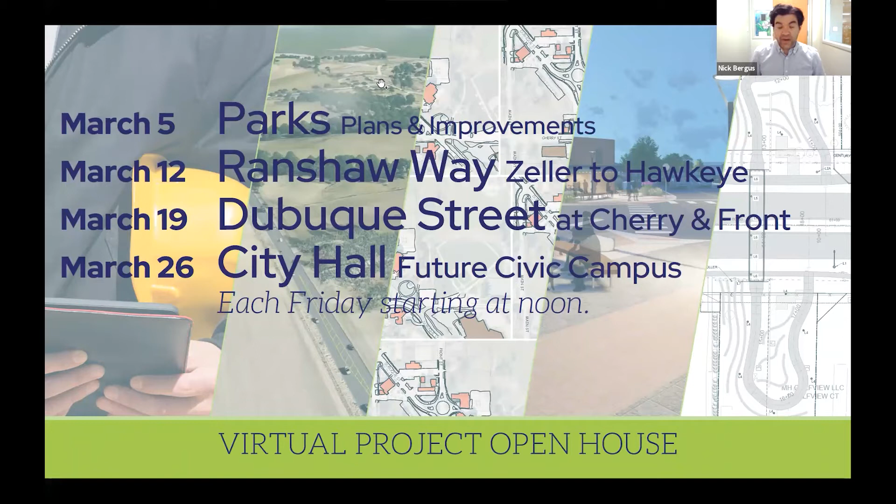So today, we are talking about Ranshaw Way Phase 5, which is improvements from Zeller Street to Hawkeye Drive, including widening that road, trails, side paths, an underpass, and obviously some landscaping in there.

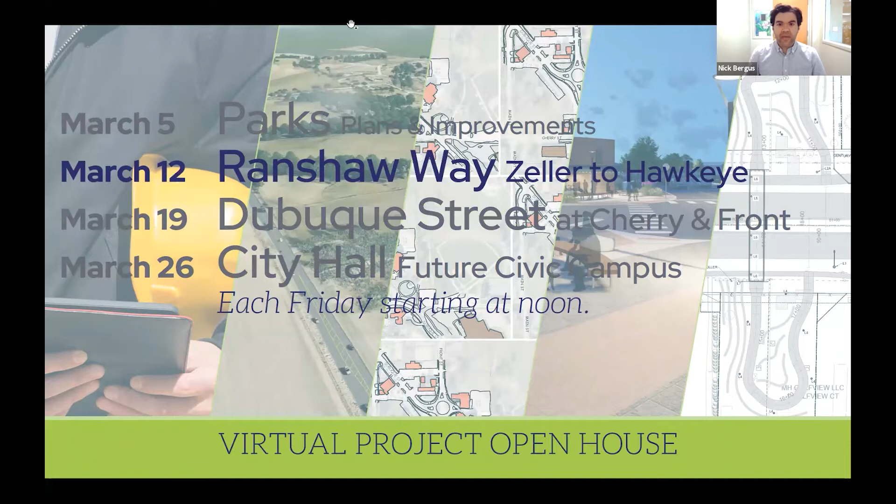Before we get to that, I wanted to start by introducing the project team here today. With me today is City Administrator Ryan Heiar. Ryan, thanks for joining us. Engineer Josiah Bilskemper, who's with Shive Hattery, the engineer on this project. And landscape architect Emily Naylor. She's also with Shive Hattery and has worked on a lot of beautification here in North Liberty. Thank you both for joining us on this too.

So let's go back to the locator map here. This is, again, work that'll be happening on Ranshaw Way between Zeller Street, where we left off at the last project, and all the way down to Hawkeye Drive, which is right about here.

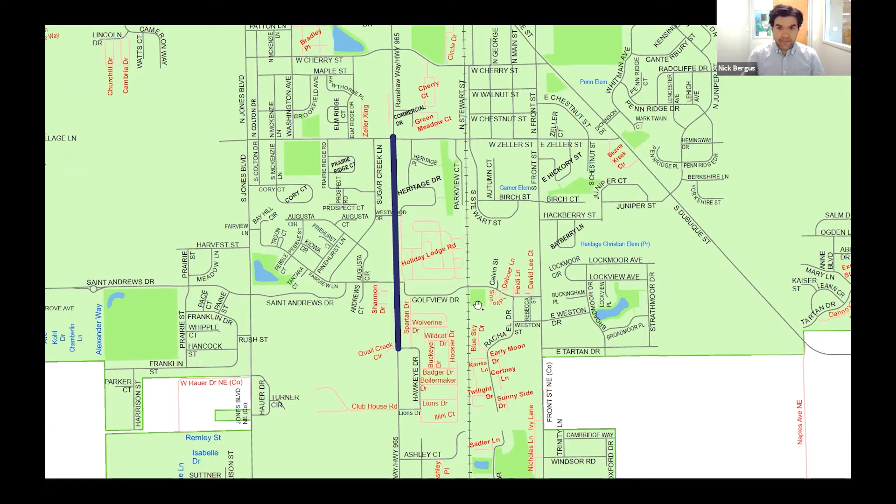So I wanted to bring Ryan Heiar in just to talk a little bit about sort of where we started, how this fits in with some of those previous phases and why now, and some of those other big questions. Ryan, thanks for joining us. Well, good afternoon, everyone. Thanks for organizing this, Nick.

This project has some history, actually. In 2007, shortly after I actually arrived in North Liberty, the city council approved a master plan for then what we called Highway 965. That planning process took about a year or so, and then early in 2008, they approved the plan. And what I really liked about this process is that it was a joint effort between the city of North Liberty and the city of Coralville.

And so what we've called the Highway 965 master plan, now the Ranshaw Way master plan, also extends down to Coral Ridge Avenue in Coralville. So it's a great planning exercise between both communities.

So we are, what Nick I think entitled it, the phase between Zeller and Hawkeye. We're affectionately calling phase 5 of what we're hoping is 6 phases altogether to complete the master plan. So to date, we've completed 1 through 4.

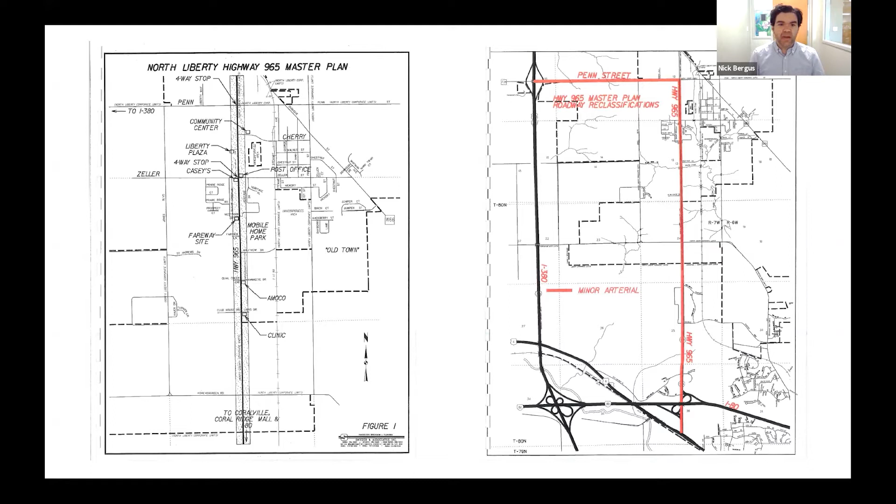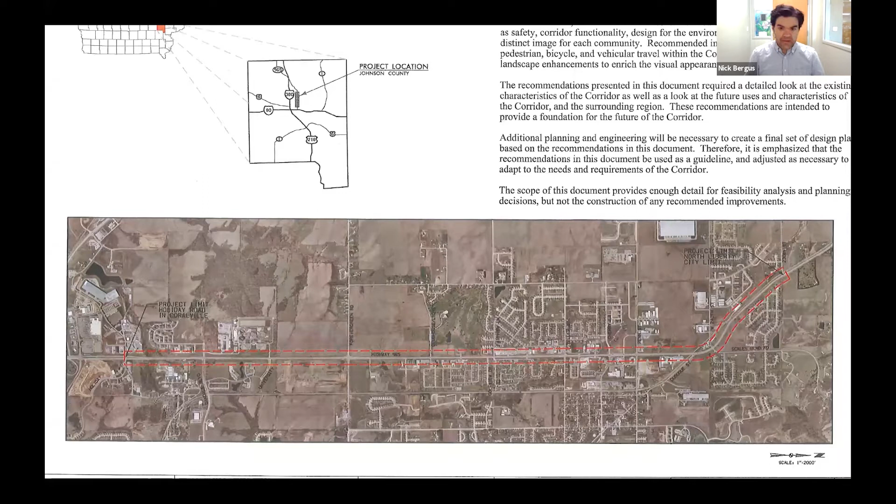So there's not much out there yet, so this has been a long time coming. This has been a major arterial for a long time, and we've paid a lot of attention to it. As Ryan mentioned, we do have the master plan that we worked on with Coralville, and we've stuck pretty much to it. This is the North Liberty intersection sort of examples that we've been using throughout.

And I did want to bring Emily in to talk a little bit about transitioning, right, that old rural highway to what is now this urban road, and why, when we talk about that, we pay attention to not just the functionality, but maybe some of those other parts and what those can do for us. So Emily, let's talk a little bit about landscaping before we talk about the specifics—why do we do sort of landscaping and care about those things at all when we're doing transportation projects?

Sure, Nick. Well, streets account for the largest amount of public space in North Liberty. It's really a public corridor, and we really try to follow those contemporary planning practices that aim to make streets more than just vehicles going from point A to point B. So we really want to consider safe circulation for pedestrians, cyclists, drivers, and users of public transit.

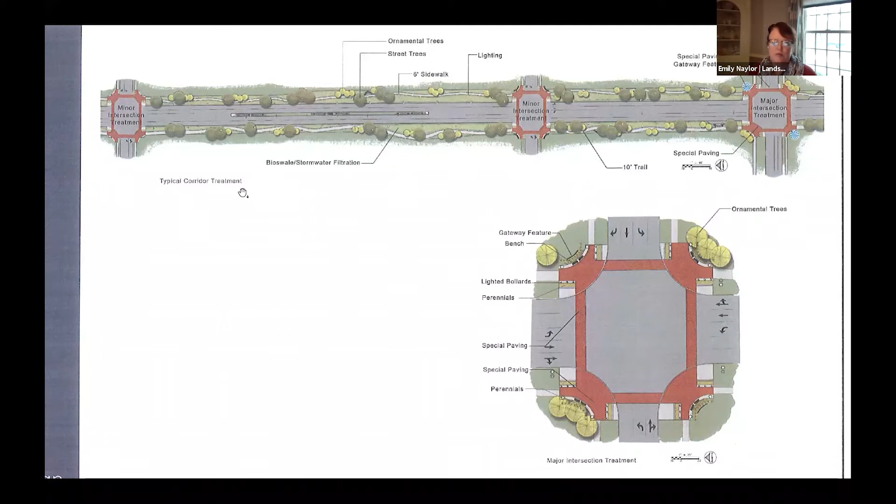In addition to building on the Highway 965 or Ranshaw Way master plan and completing that continuous aesthetic character, we also are looking at layering other ways to denote North Liberty and that community character and tie it in community-wide. So not only are we looking at this phase 5 as an opportunity to extend the original master plan theme, but also start to layer in some of those other points to tie community character. It's really one of your strongest, most considered a billboard for your community—it's a way to really repeat that community identity, so people really understand when they're in North Liberty.

And certainly with the streetscape, there's some very, very specific elements here that are going to be very unique to North Liberty and may serve as destinations in themselves. So we'll show you a little bit here in a second. Well, great, thank you, Emily.

I'm hoping to bring in Michael Pentecost, who I think has joined us. Michael, are you able to talk us through sort of what the current conditions are? Obviously, a lot of folks drive Ranshaw Way every day, but when we talk about transportation projects, we really do have to deal with what's there, and that really can impact the project. So, Michael, can we talk a little bit about what's out there right now?

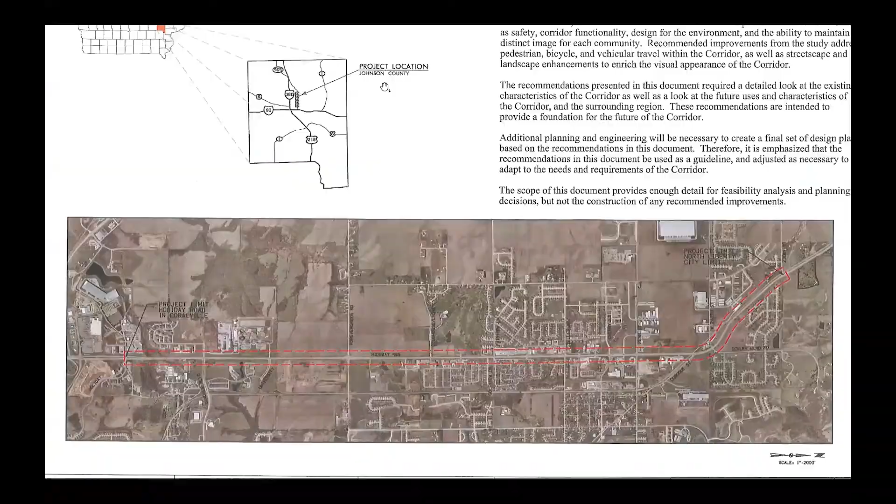And that helps for a number of reasons—it helps with traffic flow, it helps with safety. Did I lose you, or you still got me? You're still there, Michael. Okay, sorry. All right, we're getting a live report from the field. This is great.

And there we lost him. So thank you, Michael, for that live breaking news report from the field. Michael Pentecost, our street superintendent.

That was great. So obviously we're trying to solve some of those problems about efficiency. How do we move different types of traffic, whether it's bikes, pedestrians, or cars through that area? We're also working through a variety of constraints. We've got the I-380 project, which we have to consider as we make plans for this project. We've got to think about how we time this project based on other projects in town. The big one, and this is always the biggest uncontrolled factor, is weather, and that's something we try to plan around, building in some space for it.

And Michael's back with another breaking news report. Sorry, I had another call come in and it kicked me out.

So basically, for example, when my crew's out there trying to make repairs or patchwork on these sections, when you're down to two lanes, it's pretty difficult to do that. Or the gravel shoulders, those are a high maintenance area to continue to keep safe. These projects take care of that. We go to a curb and gutter system, and it really helps improve and bring things up to the traffic flow going through there.

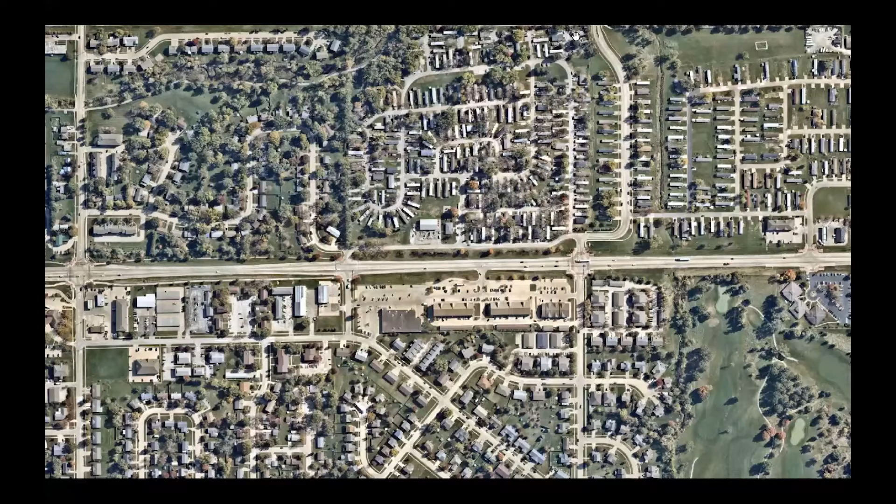So again, this is the current conditions, an aerial shot from the past year. So let's get into this project in particular, and let's start with Josiah to take us through a quick overview of the plans for the finished product.

Yeah, sounds good, thanks Nick. This graphic provides a high-level overview of the project. As everybody's mentioned, we're starting at Zeller and continuing south down to Hawkeye Drive. For this portion, starting at the north end and working south, notable improvements include rebuilding the remaining fourth corner of the Zeller Street intersection. The other three corners were done during the phase 3 project, and now everything's ready for that fourth corner to be redone to match that intersection, which is a major intersection for the city.

The overhead utility lines, like we've done in other sections to the north, are in the process of being removed and buried underground. You'll see that happening here in the next month or two, where some of those overhead lines will start disappearing.

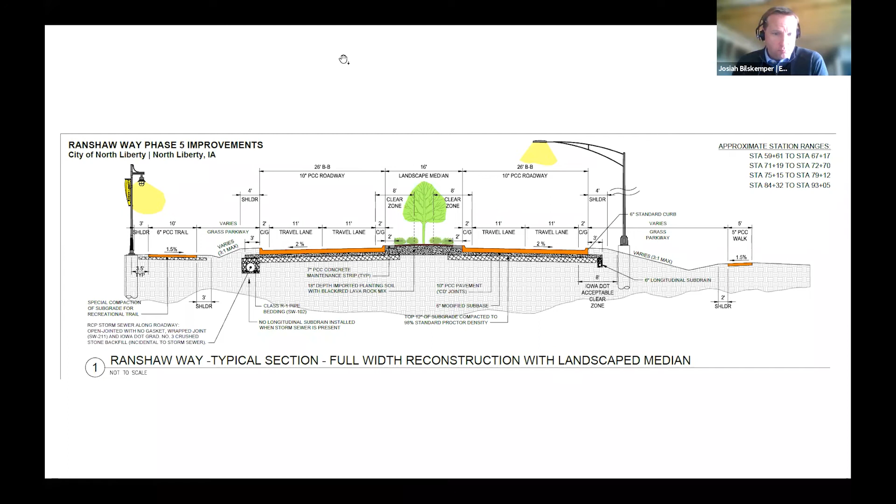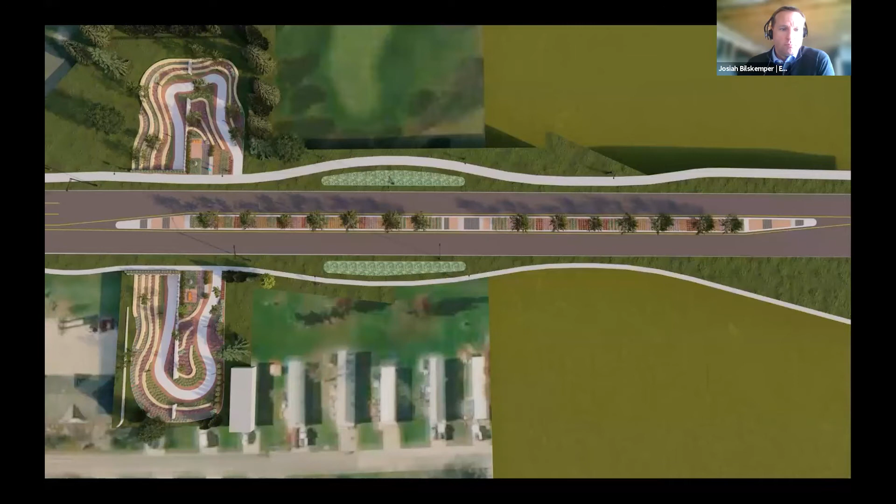All right, before we get into the phasing, I want to come back to Emily and talk through that underpass and some of the landscaping in this particular project. So this is kind of the artist's rendering of what we've got going on.

Emily, you want to talk us through these? North is again to the right there. We've got the golf course at top of screen, and City Hall is up to the left off to the corner, just for orientation. So really what we're showing here is this application of blending the existing Ranshaw corridor master plan with some of the improvements, as Josiah said, that fourth corner being built up — it's all going to be the same.

But then how do we start to layer in some of these other elements we're picking up in other places — the Dubuque Street roundabout, the new parklet near Centennial Park. So you're seeing along the median there swaths of landscaped areas, unique to Ranshaw, but reminiscent of some of the plant material you'll see in other places in town, such as along Penn Street.

So as you're coming down the bike trail, you can descend to cross under, and this is a very engineered solution — we have to get people down at a certain percentage, and we just try to add a little bit of interest there. It's not such a straight shot, and we're building out the plant palette. The city does such a great job keeping things looking great, and we've really refined that palette with things that are easy to maintain.

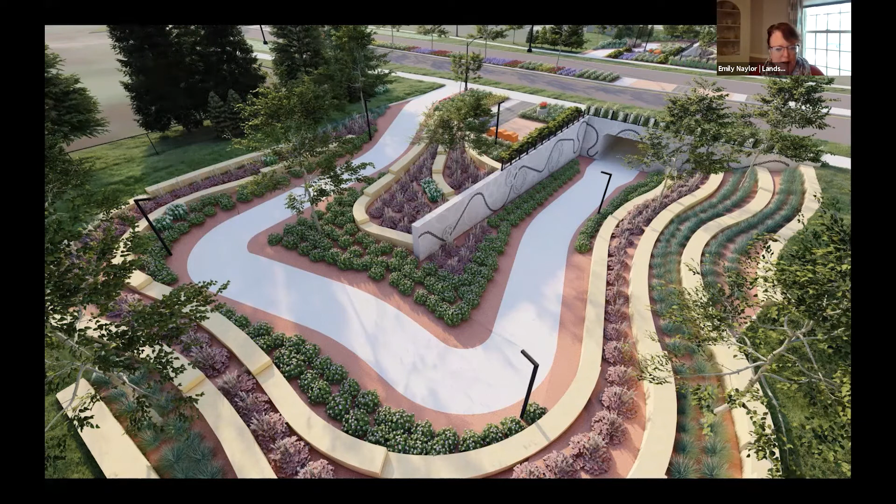And since we have to have this kind of engineered solution, this hard, crisp wall, we took the opportunity to put a playful additive there. What we have is a unique, artistic element to speak of the bike and pedestrian connection there.

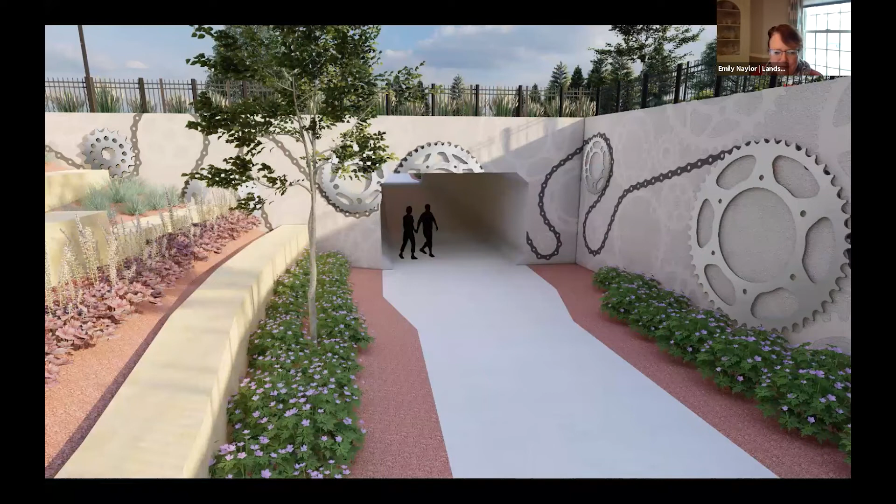We've got oversized bike gears, and the next slide shows that a little closer up. Some of the gear shapes are sandblasted into the wall, some are aluminum affixed directly to the wall, and some stand out and will actually glow at night. So it gives a little bit of interest, and almost serves as a destination.

Some people like to go out and come back a certain way, and this might be somebody's preferred trip, maybe as the sun's setting, just to go out and see the lights when they come on. So again, trying to add in those layers of additional interest and flavor to the community. I'm looking for unique opportunities in all of the public projects we do, really spreading those dollars and getting more bang for the buck.

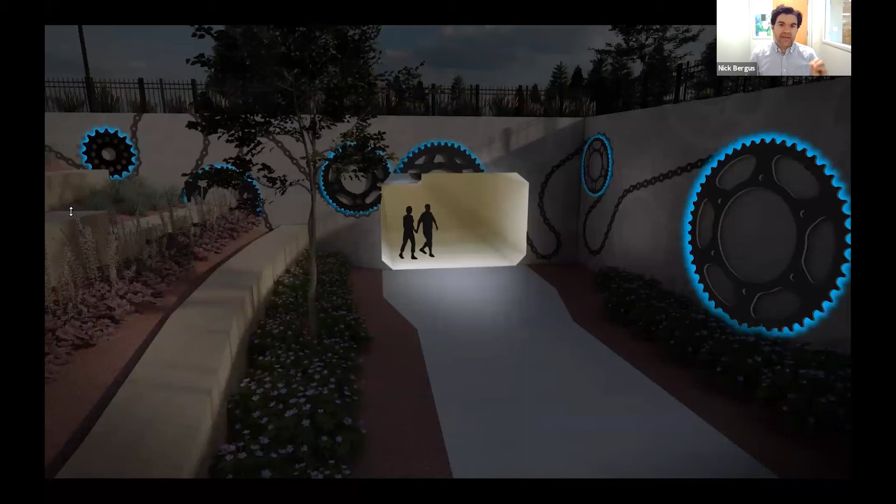Thank you so much, Emily. So Josiah, let's talk a little bit about how we get here. Obviously it's not all underpasses and landscaping — it is a road, so let's talk about phasing.

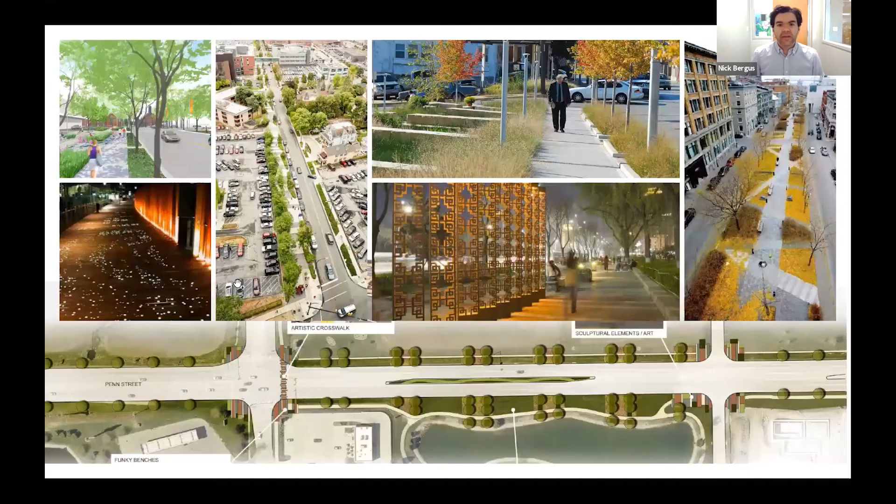Let me go back up to this one. Josiah, can you take us through — we're not doing this all at once, so let's talk about the different stages within this project. Sure. So the way we have this project planned out and anticipate happening is there's sort of 4 main phases.

Phase 1, 2, and 3 would be all of the portion of the project from Zeller to the Fairview Lane, Golfview Drive intersection — right there. So that's phase 1, 2, and 3. And then phase 4 is what we're calling everything at the south end, that south block from Fairview to Hawkeye.

In general, this is how it's laid out. Phase 1 is the chance for the contractor to put down temporary surfacing, temporary roadway lanes on the west side of the road. That's a fairly short duration — there'll be some traffic shifted over, but they'll pave temporary lanes there, kind of where you would see the gravel shoulder today on that west side.

Once that's done, all the traffic will then be shifted to the west side using the existing lane on the street, plus that new temporary paving, and all of the new roadway work and portion of the median work will be completed on the east side of the road from Zeller to Fairview. So they're going to be working on that east side while traffic is shifted over to the west side. Again, that traffic that's shifted over will have 1 lane in each direction, like it is today, except it gets wider at the intersections.

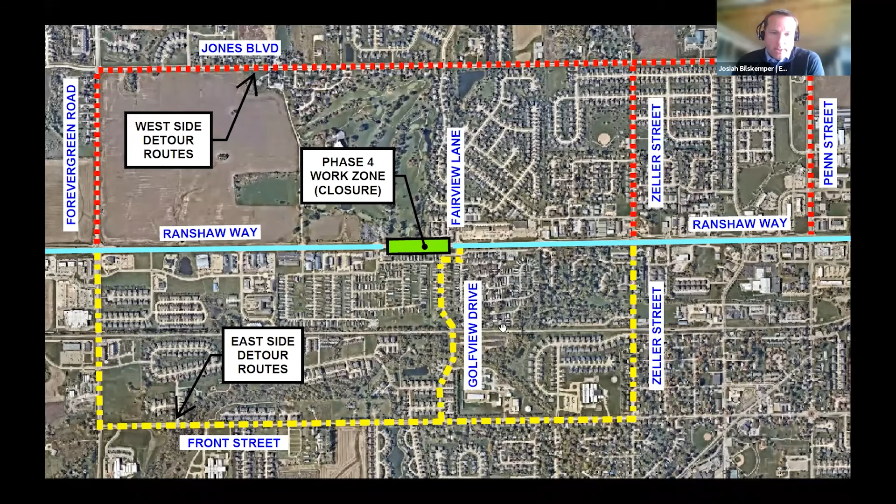Yeah, so the pedestrian underpass - we were pretty limited in this section. Most of the roadway from Fairview going north to Zeller, there's either not much relief or there is commercial and residential built out right to the edge of the right of way. So this has been targeted, and even going back to that long range planning document, this was identified as, for some of those reasons, the section where this pedestrian tunnel would most likely be located, which is between Fairview and Hawkeye. And really, we looked at two different locations there.

As far as moving it north, the nearest place you could put it is right where that box culvert is, where the creek comes through. Yep, right there.

We found some issues - long-term use issues and construction issues. Based on the depth of that pedestrian tunnel, building right next to the creek presented issues with construction and also water running through that pedestrian tunnel, anytime those flows got relatively high, and so that pedestrian tunnel would then be shut down.

Ultimately we found a spot further to the south where we had opportunity for ground on either side of the roadway to take care of that drop, like Emily was talking about. You can only come down at a certain grade, so you need length to get down under the road into that tunnel section. That's the location we designed for, and that also pulls you further away from the creek and allows drainage in and around that tunnel, still with positive flow away from the tunnel area down to the creek.

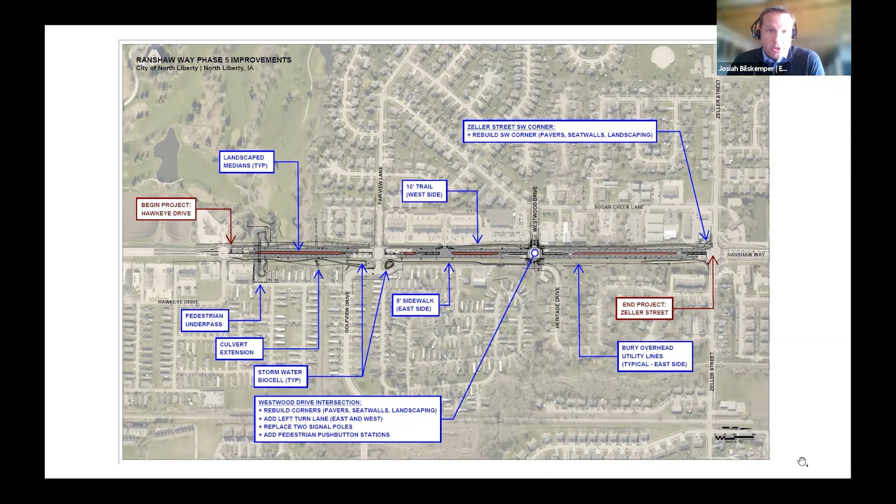Another question: will there be an underpass closer to Forevergreen as part of this project? In the concept we have for the next phase, phase 6, there is another pedestrian underpass planned closer. I don't know the exact location, but yes, closer to Forevergreen.

I want to make sure we address why we don't just detour folks down Spartan and Hawkeye right there, instead of all the way around up Jones and up Front. So Spartan and Hawkeye are on the east side near the mobile home park, and the bottom line is those are private streets owned by that development, so they're not even eligible. And you wouldn't want to detour traffic on those streets right next to those homes.

Could I make a quick point on the underpass? I know it seems like a peculiar location right now, but I suspect when the Cherry Street one was put in, there wasn't a whole lot up there either, and there's tremendous potential just south of that underpass. So from a long range planning standpoint, it'll be very beneficial for pedestrian and bicycle access.

And to add on what Ryan's saying, there are further to the north multiple traffic signal crossing locations, so you have those crossing locations further up—they're just not tunnels.

Maybe somebody can save me and answer this question. Yeah, I'll jump in here. We had kind of a messy situation in terms of our ability to get an easement we needed in the timeline the DOT wanted for us to proceed with that phase. So we did some grading there with that project, but what we anticipate is when that site redevelops, the sidewalk will be installed. We don't have a timeline for that, since it's private property, and it'll depend on when development occurs there. But yes, it's planned for.

And we go through trail priorities every year and incorporate that into our CIP, our capital improvement plan, so I would expect to look at it at that point as well.